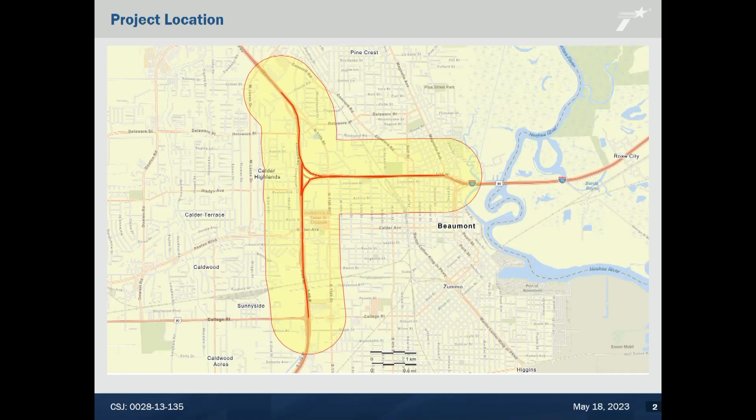So to begin, I'd like to talk a little bit about the project. TxDOT and the Federal Highway Administration proposed to reconstruct and expand I-10 and US 69 where they converge in the city of Beaumont and Jefferson County. The proposed project would widen the existing I-10 from Hollywood Overpass east to 7th Street.

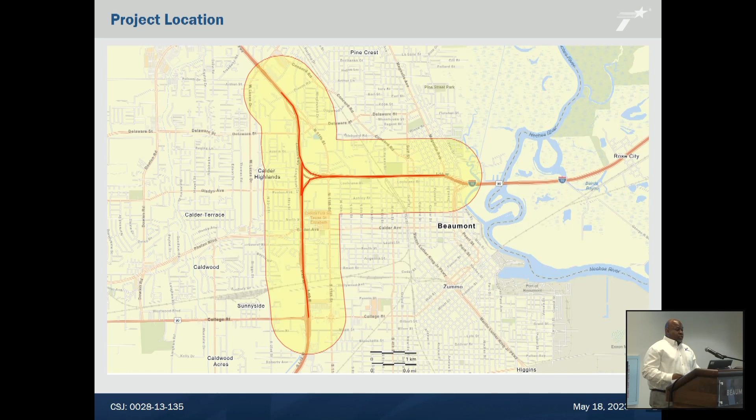So what's our goal tonight? First, to provide you with a general overview of our traffic noise analysis and criteria used to develop our preliminary noise barrier recommendation. Next, to explain your role in making your voice be heard. After learning about the updated noise barrier design, you'll be invited to cast a vote for or against the noise barrier. Details regarding the aesthetic and landscape design elements as they pertain to the noise barrier are a part of tonight's presentation as well.

By the end of this evening, we want to have provided you with all the details necessary to make an informed decision in order to vote for or against the updated noise barrier design.

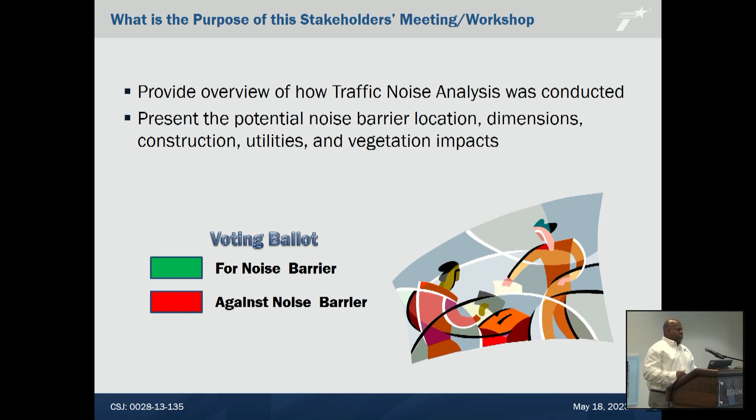I'll start out with some general information regarding sound and noise, just to give you guys some background information. Then I'll describe how the traffic noise analysis and abatement process was conducted for this project. Then I'll describe the previous noise barrier design and compare it to the updated noise barrier design and the differences between the two. The project team will be available after the presentation to answer any questions that you may have.

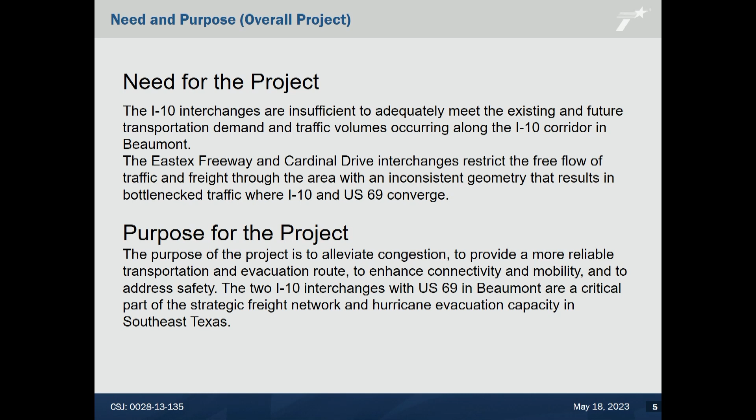So, need and purpose. The purpose of the project, and this is the overall project, is to alleviate congestion, to provide a more reliable transportation and evacuation route, to enhance the connectivity and mobility, and to address safety. The two I-10 interchanges with US 69 in Beaumont are a critical part of the strategic freight network and hurricane evacuation route capacity in Southeast Texas.

Tonight's presentation will only focus on the Eastex interchange. Cardinal Interchange is under construction right now, and so now we're focusing on the second part of the overall project.

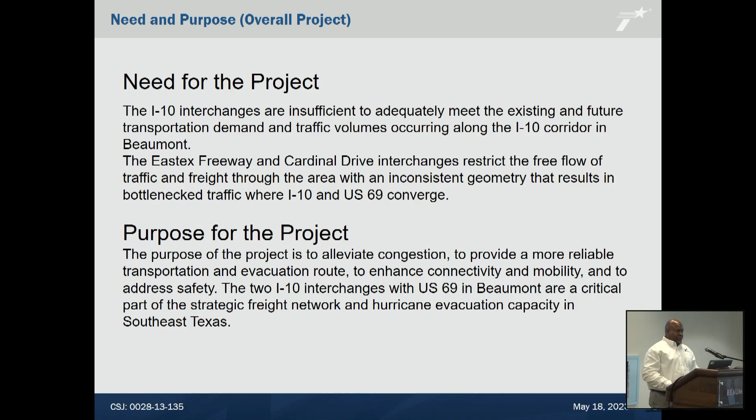A noise workshop for the original design of noise barrier 3 was conducted in the summer of 2021, with the outcome of the voting associated with that particular workshop being for the noise barrier.

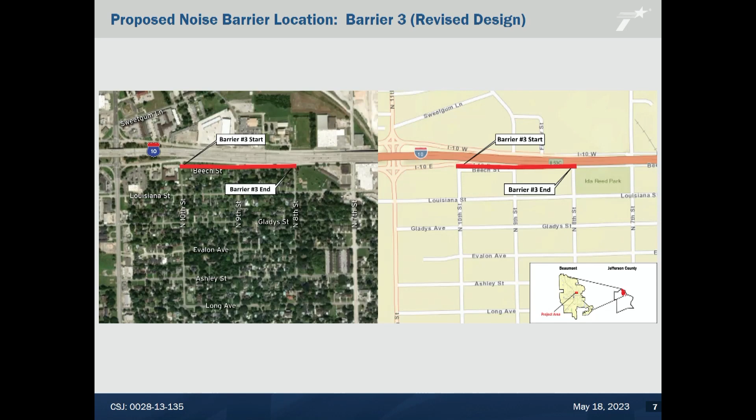Beach Street would also be reconstructed within the existing right-of-way in this area to facilitate the construction of the proposed noise barrier. This redesign of barrier 3, along with the street modifications associated with it, is the reasoning behind revisiting the impacted citizens and conducting a second noise barrier workshop.

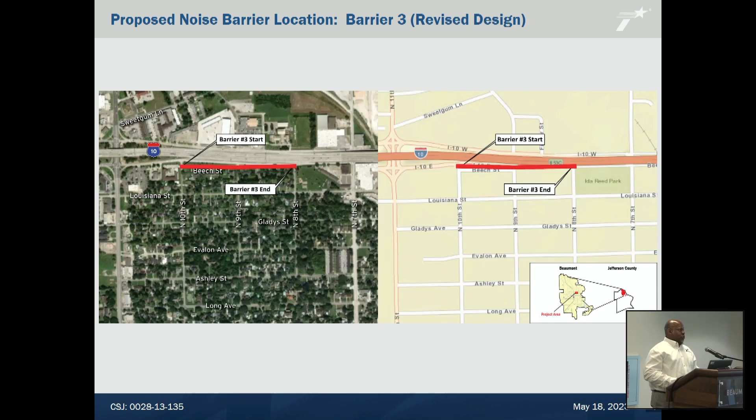So just to give a quick recap or summary of the items that I covered for the improvements and project changes: the barrier will now be continuous from 10th Street to 8th Street. This new updated version of the sound wall includes closing of 9th and 8th Street at Beach Street. Beach Street would also be reconstructed from 9th Street to 8th Street.

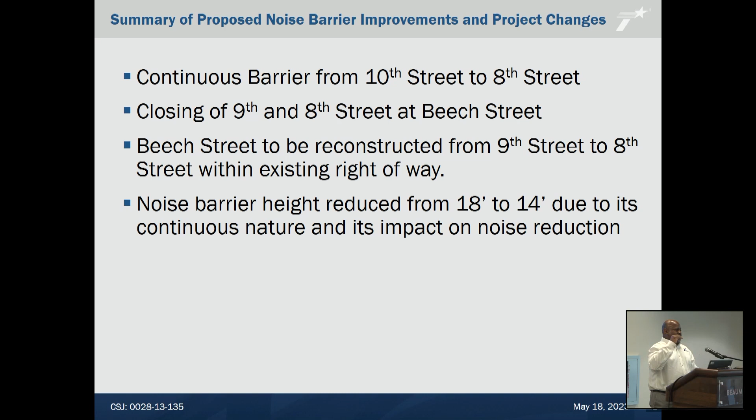And then too, the noise barrier height on the previous design was 18 feet, but due to having a continuous barrier, the height will be reduced from 18 feet to 14 feet.

So let's discuss some general information regarding sound and noise. Then I'll describe how the traffic noise analysis and abatement process was conducted for this project. Then I'll describe the updated noise barrier design in more detail. What is sound?

Sounds are vibrations traveling through the air as sound waves. Noise, on the other hand, is unwanted sound.

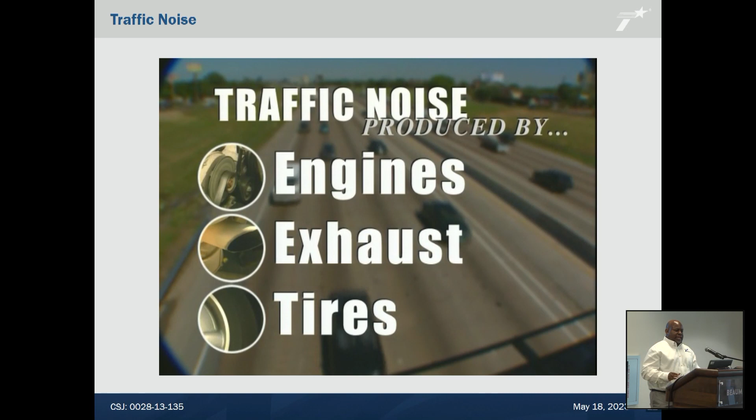Cars and trucks generate noise. This traffic noise is produced by the movement of engines, the vibration of exhaust systems, and the friction of tires against the roadway. The loudness of noise from traffic depends on the roadway surface type, the amount of traffic, how fast the traffic is moving, and the number and type of vehicles traveling on a road. For example, 18-wheeler trucks with their bigger engines and many tires produce more sound than a typical four-door passenger car.

In general, the more traffic on the road and the faster traffic is moving, the louder it will be for a person near the road. Additionally, if you are within the line of sight of a highway, it's going to be louder than if you don't directly see the road, because sound is loudest when it travels in a straight path.

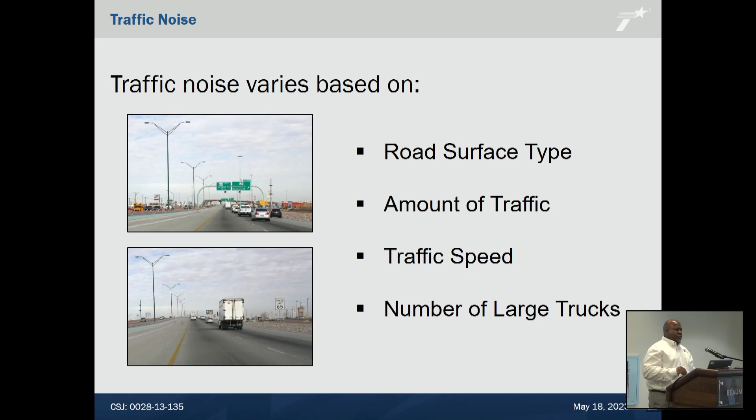Sound waves move outward from a source in all directions. When there are no objects in between the source and your ear, the noise will travel in a direct path. However, sound can be reduced by placing a solid object or barrier, such as a wall, in between the source and the receiver.

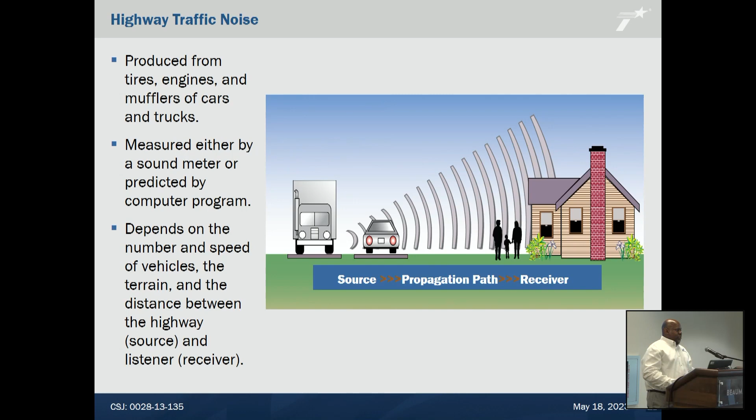The location and height of a barrier can affect the amount of noise that is reduced. Highway traffic noise is often blocked by buildings. Tall fences can reduce sound levels, but no barrier can completely block all traffic noise.

Topography can also affect highway traffic noise levels. When the highway is either higher or lower than the receiver, overall noise levels are reduced. In both these cases, the sound waves have a longer path to travel.

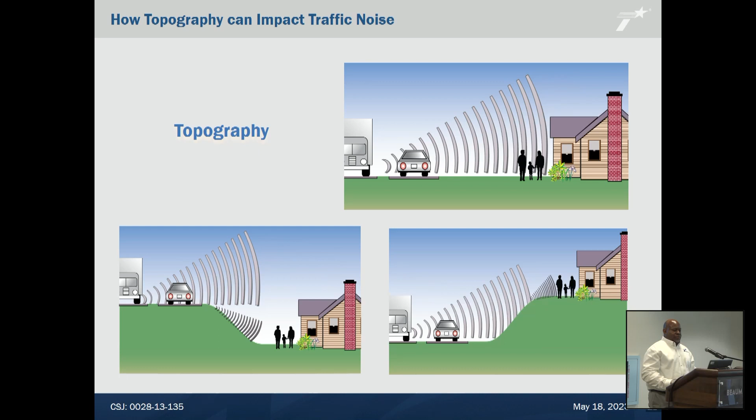So, traffic noise analysis. How does TxDOT evaluate traffic noise and noise abatement for highway projects? The Federal Highway Administration, or FHWA, requires that we conduct noise studies when federal funds are utilized and when adding capacity on existing highways which may have an increased effect on noise. The purpose of our noise study is to investigate the impact that the I-10 US 69 Interchanges project has on the nearby outdoor areas frequently used by people.

The noise analysis for this project was performed in accordance with TxDOT's guidelines for analysis and abatement of roadway traffic noise and reasonable cost proposal for 2018 noise policy. The TxDOT guidelines have been approved by the FHWA. The Federal Highway Traffic Noise Modeling Software, known as the Traffic Noise Model, or TNM, was used to calculate the existing and predicted future traffic noise levels along the roadway project.

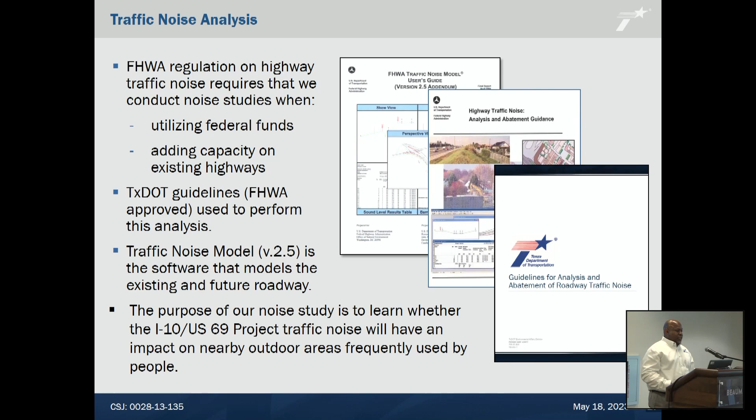A traffic noise analysis is a multi-step process. A noise workshop is usually one of the last steps in this process before the final engineering plans are approved and the project is constructed. The noise analysis process includes identifying noise receivers, modeling noise levels, identifying potential noise impacts, considering abatement for noise impacts, and finally, talking to benefited residents and owners adjacent the road about the results of the noise analysis and soliciting the vote of property owners at a noise workshop.

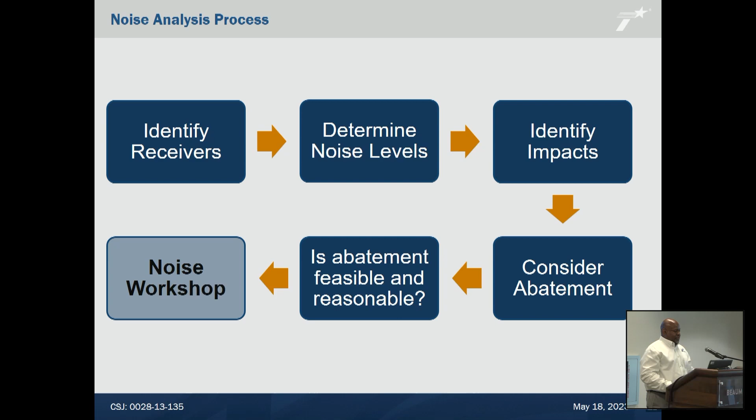The purpose of a noise analysis is to determine whether traffic sound from a highway will have an impact on nearby outdoor areas frequently used by people. These areas are called receiver locations, or just receivers. Some examples of receivers include residential backyards, playgrounds, and schools.

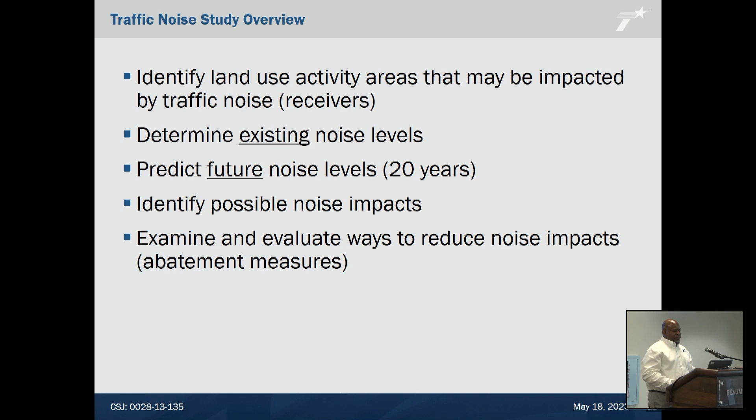After identifying receivers, a noise analysis determines existing and future noise levels at those locations. Then, based on the predicted noise levels and criteria, the noise analysis identifies possible noise impacts and looks at ways to reduce those impacts. The traffic noise analysis is performed using an approved computer modeling software called Traffic Noise Model.

The computer model requires the analyst to enter noise receiver locations, the amount of traffic, and traffic type. Traffic type is the percentage of cars, medium trucks, and heavy trucks. The model also considers how fast the traffic is moving, the roadway design, and surrounding terrain features. Traffic noise is modeled for both the existing traffic and roadway conditions and for future traffic projections and the proposed highway design.

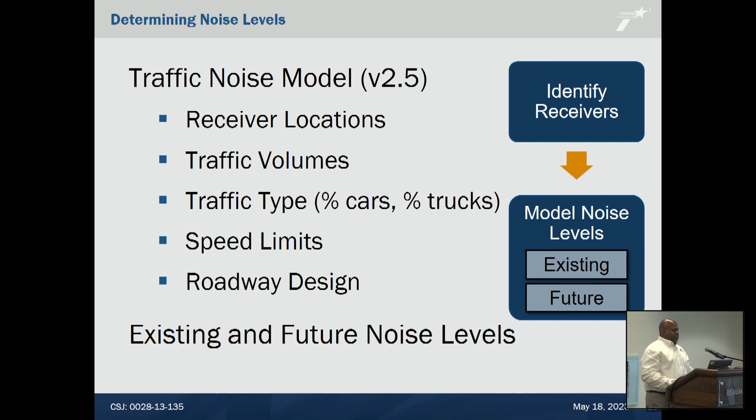So how do we determine if there will be a traffic noise impact? We use noise abatement criteria established by the Federal Highway Administration. The noise abatement criteria, or NAC, for residential land use is 67 decibels. A decibel is a measure of the loudness of sound.

There are two types of noise impacts. An absolute impact is when the predicted noise level at a receiver approaches, equals, or exceeds the noise abatement criteria value. For residential properties, the impact would occur if the predicted noise level is 66 decibels or more. A relative noise impact is when the predicted noise level is substantially higher, that is, when the future noise level is more than 10 decibels higher than existing noise levels. If there's a noise impact identified, then the next step is to consider abatement measures.

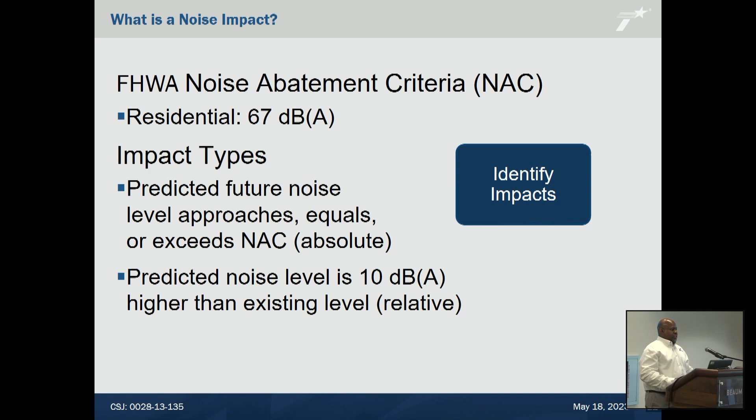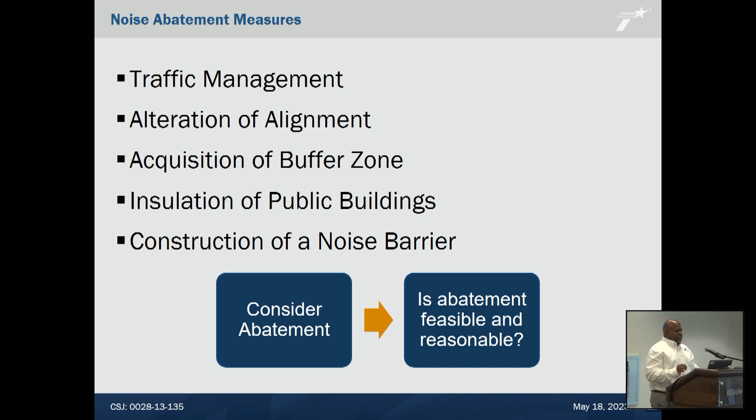Abatement measures are actions that could lower the noise level. These include traffic management, alteration of the roadway alignment, acquisition of buffer zones, insulation of public buildings, and finally, the construction of noise barriers. Construction of noise barriers has been determined to be the best solution for this particular project.

So what is a noise barrier? Noise barriers are solid walls or barriers that are constructed between the highway and people in order to help reduce noise levels. Noise barriers can reduce noise levels but do not completely block all noise. However, a noise barrier cannot be proposed unless it is determined to be both feasible and reasonable.

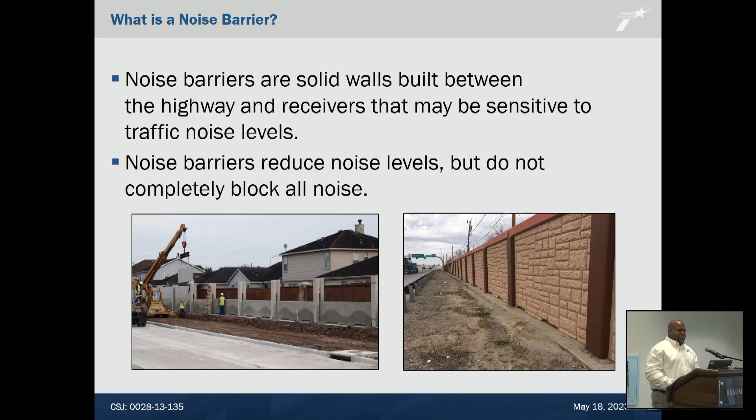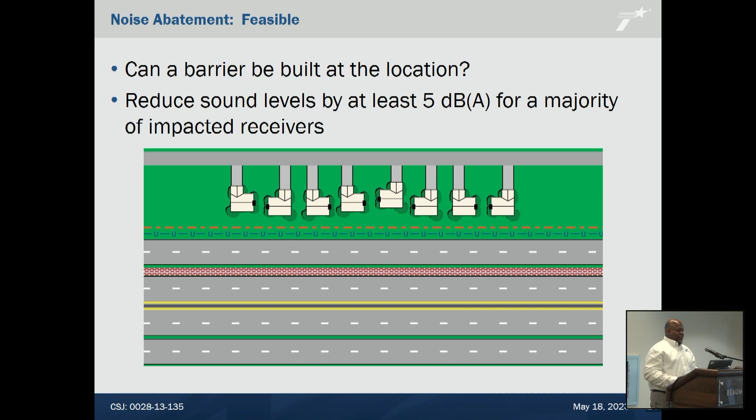What makes an abatement measure feasible? Feasibility first means that a noise barrier can actually be built in a location given site constraints such as topography, driveway access, drainage, utilities, and maintenance. Feasibility also means that the noise barrier must provide a substantial reduction in noise levels. A substantial reduction is defined as a reduction of at least 5 decibels at greater than 50% of the first row impacted receivers. The second criteria is that a noise abatement measure should be reasonable.

There are 2 measures of reasonableness. First, the baseline cost of a barrier is $25,000 per benefited receiver. Second, a proposed barrier has to meet a noise reduction design goal to provide a 7 decibel decrease for at least 1 impacted receiver.

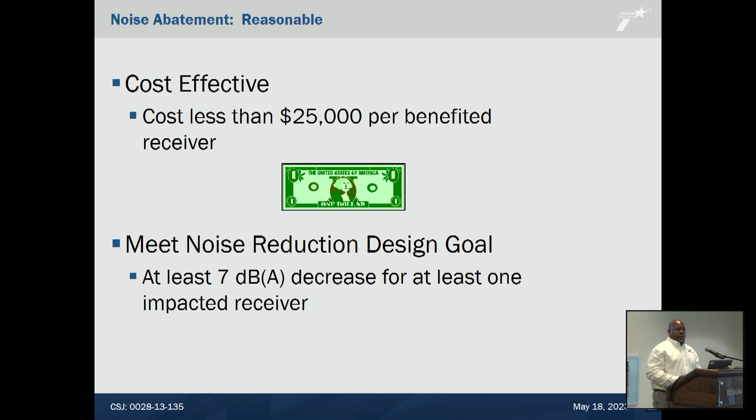For this project, noise levels would approach, equal, or exceed the level at which the Federal Highway Administration would consider noise abatement. As a result, noise barriers were evaluated at the I-10 US 69 interchange. It was determined that the construction of noise barriers in 4 locations along I-10 and US 69 could provide feasible and reasonable traffic noise abatement for this project.

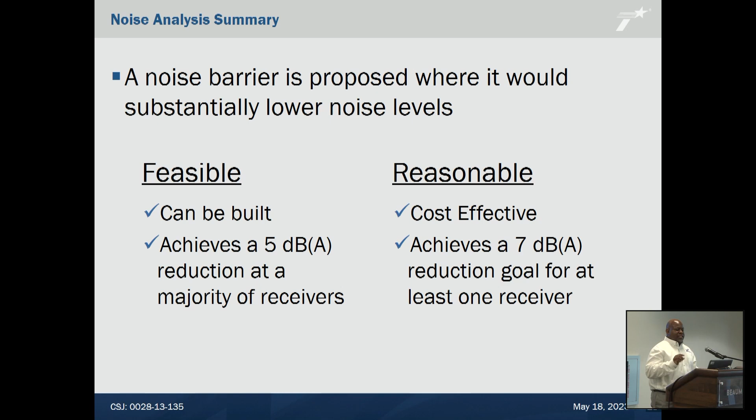This design revision is being recommended due to sight distance issues brought forth from the previously shared design, as well as to minimize conflict points and areas between local street traffic and the I-10 eastbound frontage road traffic, as well as the I-10 eastbound on-ramp entrance traffic.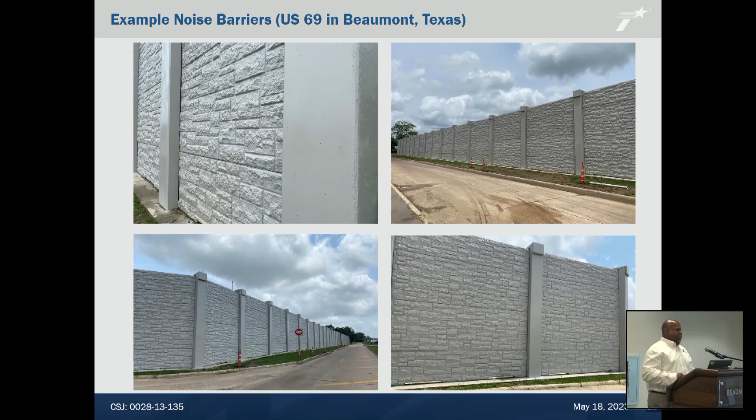So noise barriers are intended to provide positive aspects to neighborhoods, but there are some negative impacts that could occur as well. Noise barriers are designed to reduce the traffic noise and are normally well received. However, they can also result in restricted views, feelings of confinement, can affect sunlight, and in some instances, limit access to nearby streets. Noise barriers may also provide a surface for graffiti.

Finally, it's important that you know that a noise barrier will not eliminate all noise. There will still be noise, but it would be decreased.

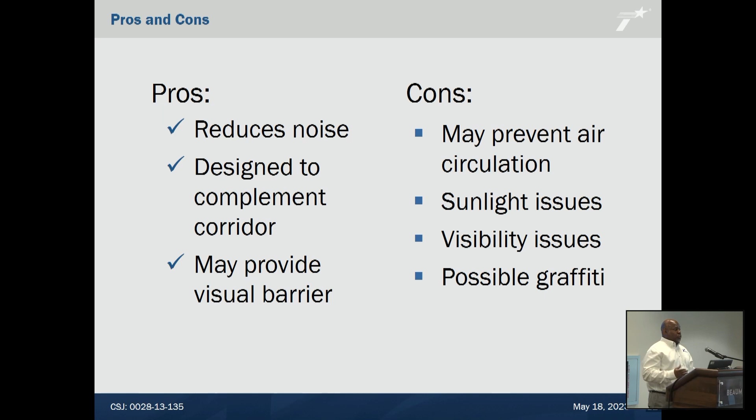So who can vote? To be eligible to vote, you must be the owner or resident of a property that touches the right-of-way line near where a barrier is proposed. Only 1 vote is allowed per property.

Some residents that are not directly adjacent to the right-of-way line have been identified by the noise model. Those persons can also vote. Not all votes are counted equally. A weighting system is applied based on owner occupancy.

For owner-occupied dwelling units, the property owner's response counts as one vote. If multiple ballots are received from multiple owners of the same unit, for instance a husband and wife submit a ballot, they are collectively counted as one vote. For non-owner occupied dwelling units, a response from the resident or renter counts as 10% of the vote, and a response from the property owner counts as 90% of the unit's vote.

You may only vote for or against the proposed barrier nearest your property. The decision to construct a particular barrier is based on a simple majority vote. For example, if there are 30 property owners eligible to vote, then a majority is 16 votes. So if 16 or more owners vote in favor of the barrier, then a noise barrier will be built for that location. A majority of votes against the barrier would mean a barrier would not be built at that location. The decision will be based on a majority of votes received. Each proposed barrier is considered separately during the voting process.

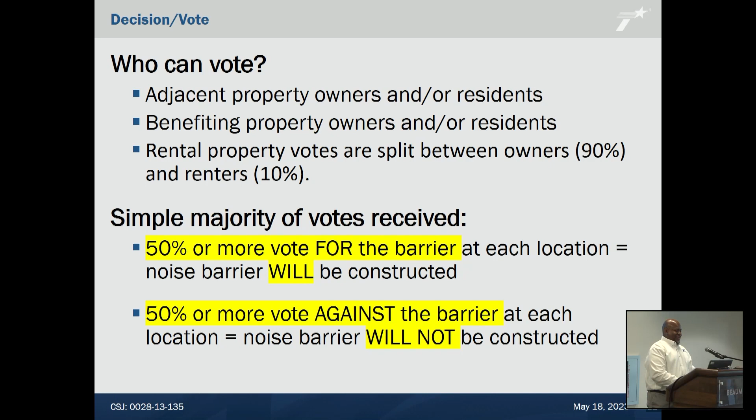Now I'd like to direct your attention to the noise ballots. We have noise ballots on the back tables if you didn't receive one in the mail. They're both in English and Spanish. Please know that the eligible voters are those that own or rent property adjacent to the right-of-way line near the proposed noise barrier, or those identified to benefit from the barrier.

So that we can count your vote correctly, please provide your full name, address, and telephone number. Please vote for if you're in favor of a noise barrier near your neighborhood, or against if you do not want a noise barrier constructed. There is also a place on the noise ballot to provide comments if you choose to do so.

Once again, it's important that we receive your vote. Please mail ballots to the address listed in the slideshow above: Ms. Nancy Perrone at the Texas Department of Transportation, Beaumont District, 8350 Eastex Freeway, Beaumont, Texas, 77708 zip code. All votes must be postmarked no later than June 2nd, 2023. So you've got a couple of weeks.

Following the Friday, June 2nd, 2023 deadline for ballot submittal, ballots submitted by the benefited residents and owners adjacent to the proposed noise barriers would be tallied. If at least 51% of the ballots tallied show support for construction of the updated noise barrier design, the revised barrier design would then be incorporated as part of the design package for the Eastex Interchange project. So if you know your neighbors and you are for the wall or against the wall, reach out to them and get them to cast their vote.

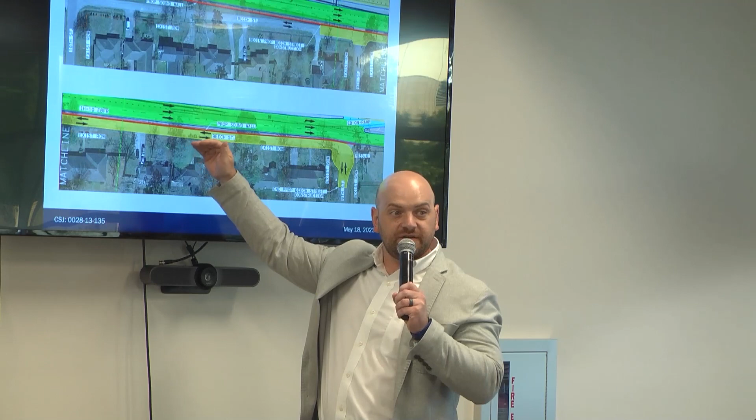Part of what we're coming in here today, based on what you saw last time, is that the wall location and the detailed design resulted in having to reconstruct a certain portion of Beech Street. Beech Street, as you see here in the yellow, is the section that would have to be reconstructed. It is all within the TxDOT right-of-way.

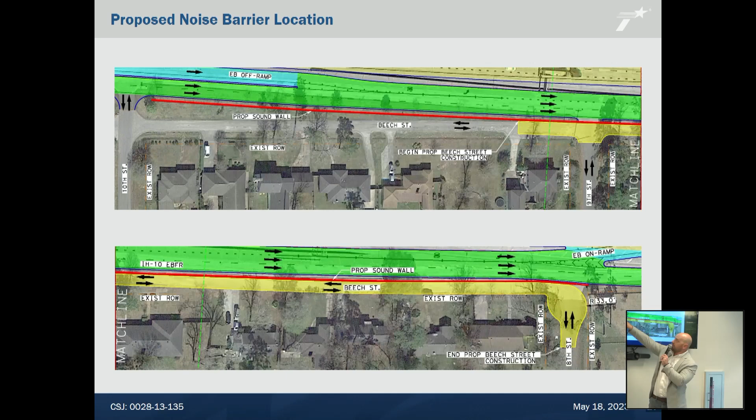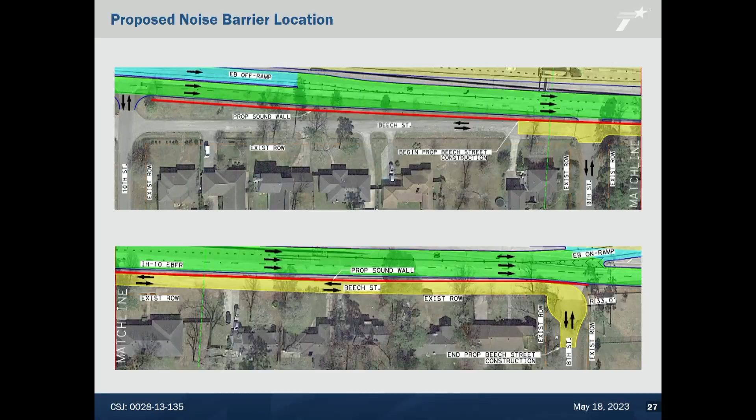The existing right-of-way that's there would fit within it. There's no new right-of-way being acquired in this area, and the red line would be right in there. So the frontage road is up here, the wall, and then Beech Street. This is the frontage road up here, yes. So frontage road, sound wall, then Beech Street, which would separate it from the frontage road.

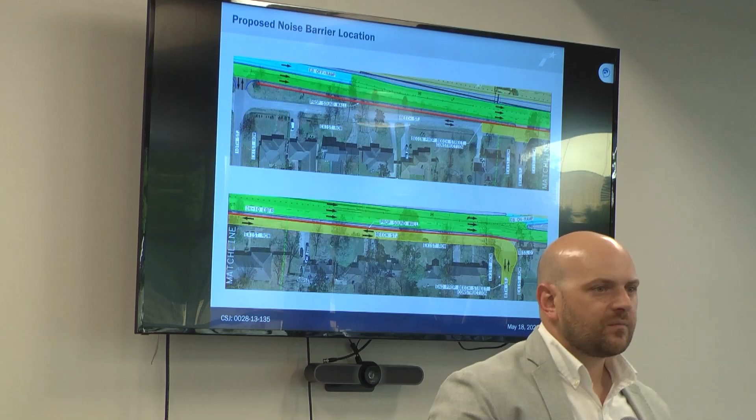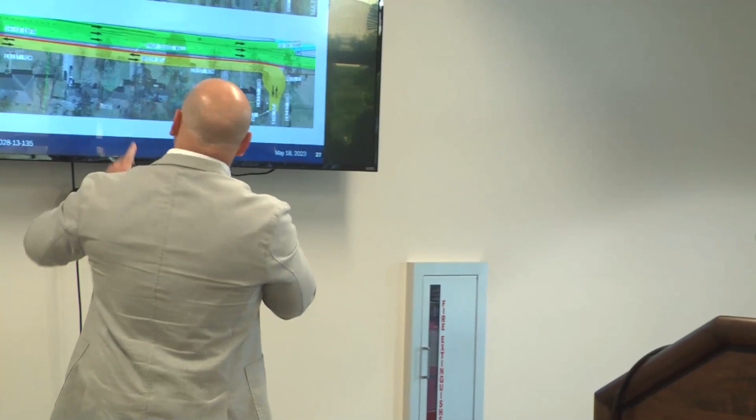Yeah, it's going to hug basically the north side of existing Beech Street today. That's where the location will be. Why was it reduced from 18? In the noise modeling, there was an opening previously right at 9th Street. When there's an opening in a wall, the way that noise passes through that opening can actually amplify it in some ways. And so when we connected the whole wall, we reran the noise analysis, and it resulted in a shorter wall that was needed to provide an equal level of benefit.

It is similar to that, yes, ma'am. There are some standard patterns that are readily constructible that the state reuses through most of the area. Dave, hate to put you on the spot, but the exact location is at Anderson, I believe, correct, for that wall that was recently built? Right. Yeah, and there is an anti-graffiti coating aspect to that as well. That doesn't prevent it from getting graffiti, but it's easier to clean off once it is applied. So, we do have some detailed exhibits at the back too, and I'm more than happy to walk you through that individually by your house location if you've got specific questions after the meeting.